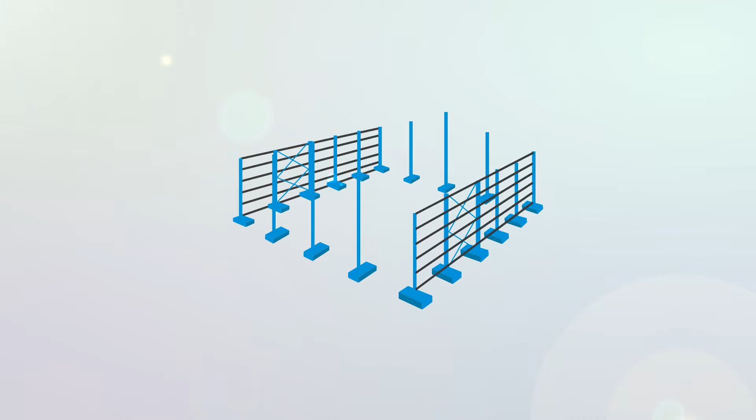Portals DIY is Lemco's exciting new mass-produced high-quality structural steel range, which allows you to unpack and build the structure yourself by following the installation guidelines we provide. The aim is to provide the most cost-effective do-it-yourself steel structure, able to be transported to remote African countries and locations, allowing business owners to take advantage and save costs.

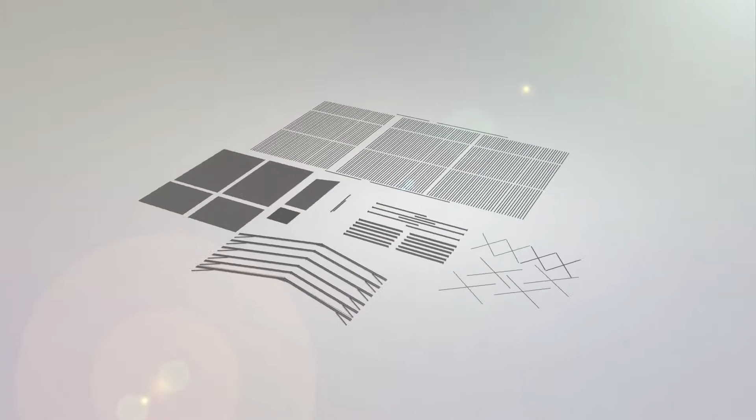The Portals DIY kit can be pre-ordered via our simple-to-use website, where you input the exact measurement size you want. The structure is then delivered to a location closest to you in a pre-packed container with a comprehensive installation guide. You are then able to unpack and build the structure yourself. Simple, easy, and cost-effective.

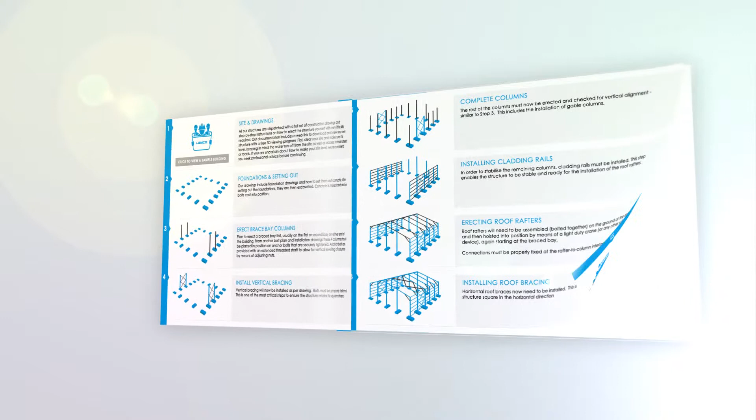Step 1. Assembling the structure is made easy thanks to our step-by-step guide, which we dispatch with the material, including an online link to download and view your own structure. Step 2. First, you would plot the foundations in the correct dimensions by placing markers on the area where the structure would stand. The foundations are then excavated. Concrete is mixed and anchor bolts cast into position.

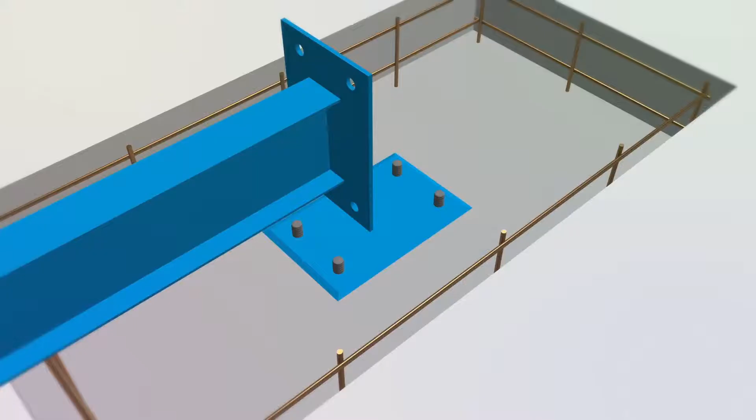Step 3. Next step is to erect the braced bay columns first. Plan to erect a braced bay first, usually on the first or second bay on either end of the building. Anchor bolts are provided with an extended threaded shaft to allow for vertical leveling of columns by means of adjusting nuts. Step 4. Then you install the vertical bracing, which supplies stability to the building. The cladding rails for the braced bays on both sides should now be installed.

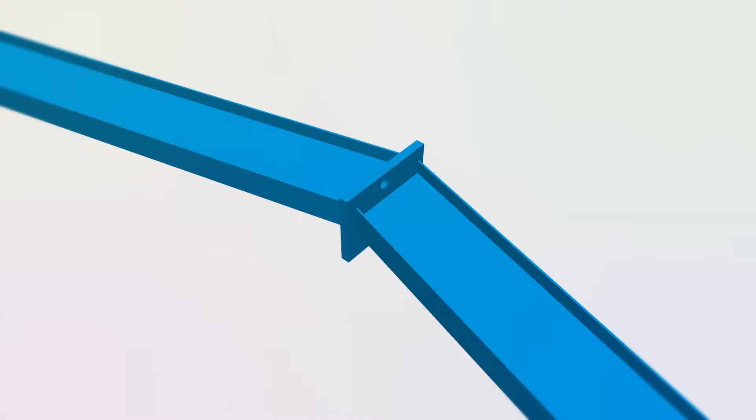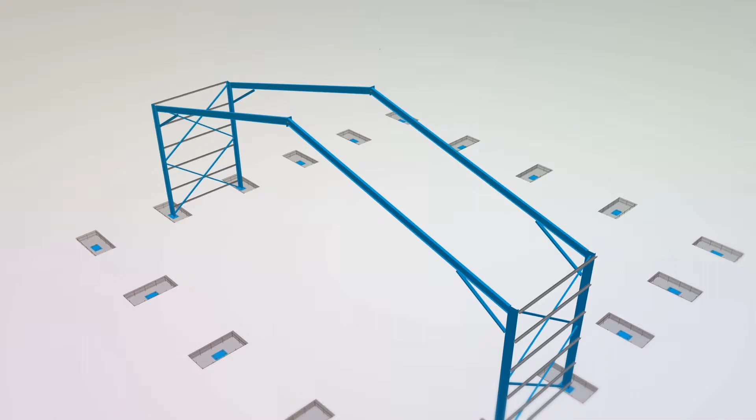Step 5. Roof rafters for the braced bay will need to be assembled, bolted together on the ground at the apex, and then hoisted into position by means of a light-duty crane or any other suitable device. Connections must be properly fixed at the rafter-to-column interface as per details. Step 6. Horizontal roof braces now need to be installed on the roof rafters for the braced bays. This step enables you to get your structure square in the horizontal direction. Installation of punched galvanized roof purlins can now proceed for the braced bays.

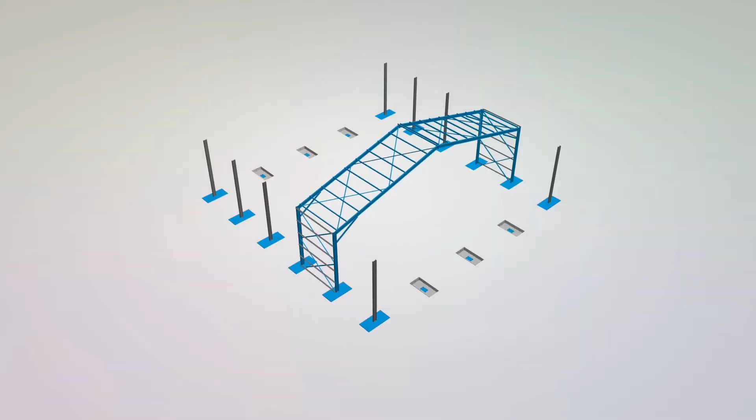Step 7. The rest of the columns can now be erected and checked for vertical alignment, similar to Step 3. Anchor bolts are provided with an extended threaded shaft to allow for vertical leveling of columns by means of adjusting nuts. Step 8. In order to stabilize the remaining columns, cladding rails must be installed. This step enables the structure to be stable and ready for the installation of the rest of the roof rafters.

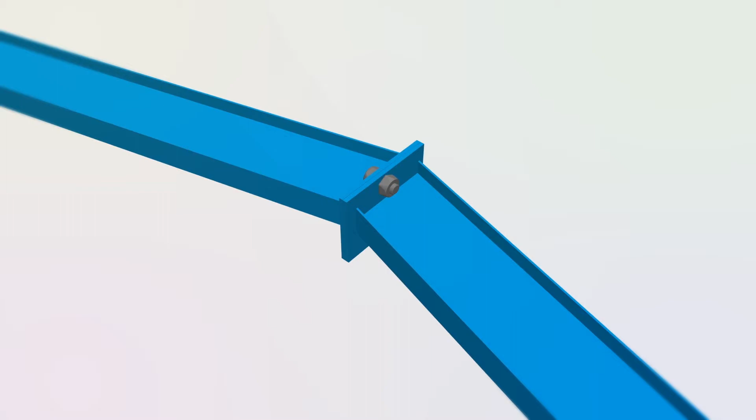Step 9. Roof rafters will need to be assembled, bolted together on the ground at the apex, and then hoisted into position by means of a light-duty crane or any other suitable device. Connections must be properly fixed at the rafter-to-column interface as per details. Step 10. The rest of the roof purlins can now be installed to each of the roof rafters, starting with the braced rafter.

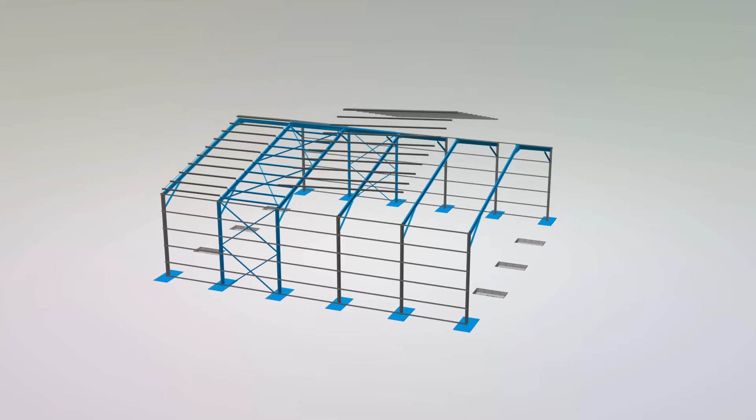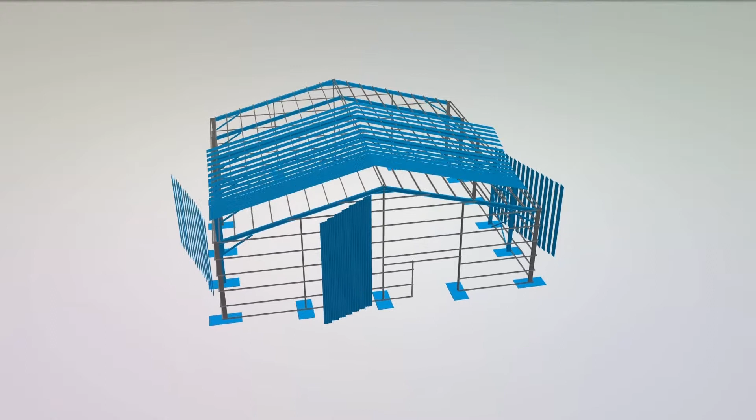Step 11. The gable columns can now be erected and fastened to the roof rafters on either side of the building. Cladding rails for the gable columns can now be added. Step 12. Finally, the roof and wall sheeting can be installed. Lastly would be the doors or any other type of add-ons. Installation depends on type of door ordered.

You can also easily get add-ons to your Portals DIY structure to suit your specific requirements, like roof vents, louvers, gutters, and many more, by making these choices on the website.

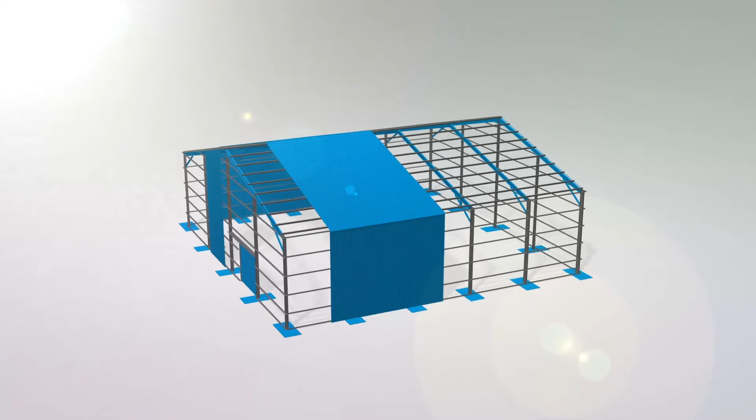Lemco has developed Portals DIY to be one of the most cost-effective steel building ranges in Africa, without compromising on our celebrated quality. All our structural designs are based on the latest SANS design codes of practice. We provide you with the high-quality steel materials you need to erect a structure in a few days' time at a very low cost to company. Many of our clients have benefited from this fast installation, instead of waiting months for a construction company's schedule to free up for them.